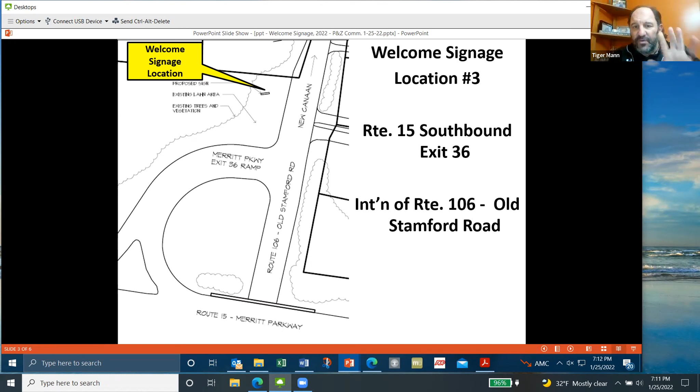This is a view of the intersection itself, and where you see that white sign with the yellow border at the top, right here, this is where we're planning on installing it. So as you're coming into town, it should be right there and very prominent for you.

We did consider this location, but again, we were looking at the fact that we were going to get snow splatter from the plows, and the sign itself might get damaged over time.

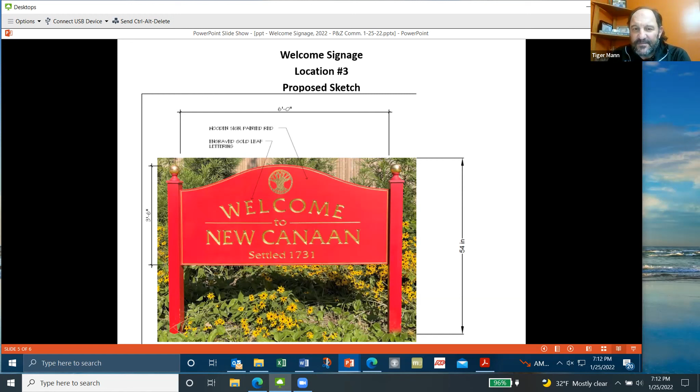Any questions for Mr. Mann? No, sounds like we're good. That was easy. Yeah, exactly.

Everyone see that? We can see it. Okay. So we were here a month or two ago for other locations in town. Now we're looking for a couple different locations and planning for the future. So I'll run you through the locations themselves. As you're aware, under 8-24 municipal improvements, no municipal agency shall locate, accept, abandon, widen, narrow, or extend any street, bridge, parkway, or other public way until the proposal to take such action has been referred to the commission for a report. So that's what we'd like to do.

Our first location is on Old Stamford Road, from Park Street to Bristow Park. I apologize, this is already under design - I didn't bring it forward when we brought the others. I actually thought I had when we brought Park Street to you, but when I looked at it, we had actually stopped at the intersection. This is about a 500-foot section, and we plan to have it on the north side of the road from Park Street right to the entrance to Bristow Park.

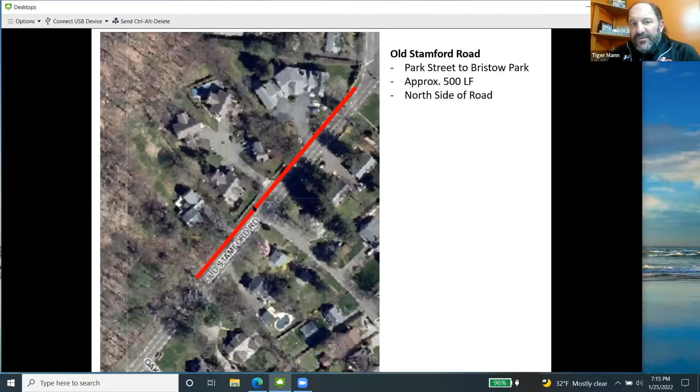The next section is actually an extension of that sidewalk. This just got recently approved with ARPA funds through the Board of Selectmen, the Board of Finance, and Town Council.

This would extend from Bristow Park down Old Stamford Road to Gower Road. It's about 1,900 feet long. At present, we're looking at the north and west side of the road, but we might be asked by the DOT or some residents to look at the south and east sides as well. So when this goes under design, we've asked the engineer to give us an alignment on both sides of the street. It comes under DOT purview, so we've got to satisfy their requirements, and one of those might be that it be on the inside of the curve instead of the outside.

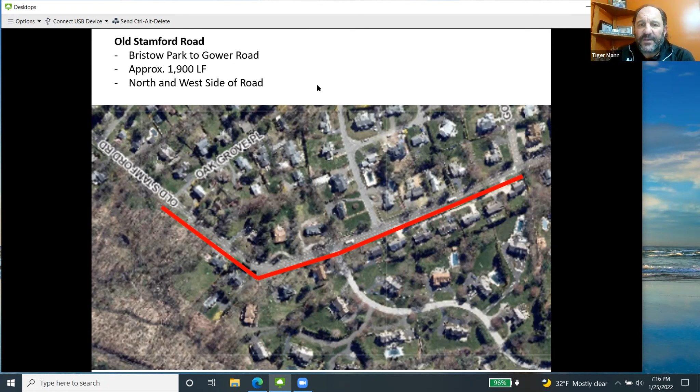The next section is on Lakeview Avenue, from Main Street to Millport Avenue. It's actually a connection. We have sidewalk on Millport Avenue leading to Lakeview, from Millport to Route 123, and then to the school on Littlebrook. This is one stretch that we don't have. We have a stretch on Millport Avenue as well, down through Mill Pond and then all the way across Millport to Main Street. This is the one stretch we do not have in town.

It's about 1,100 feet long. At present, we're looking at the north or south side of the road to see the alignment. Our preferred side is the north side. We'll take a look and see exactly what we can come forward with, but we seem to have much more right of way and some additional pavement on the north-hand side, and it seems like it would be an easier fit. The Millport apartments are here, and there's another set of condos here. It seems to fit nicely on the north side of the road.

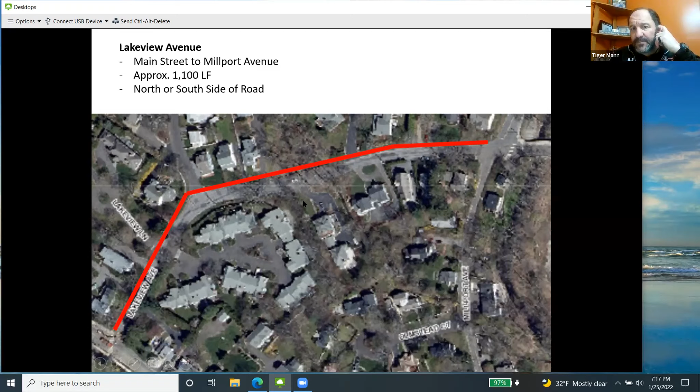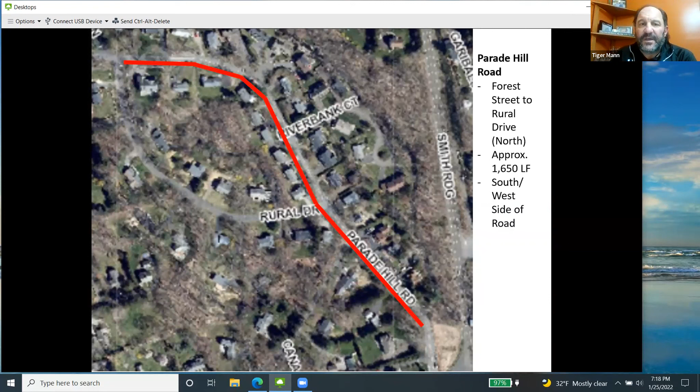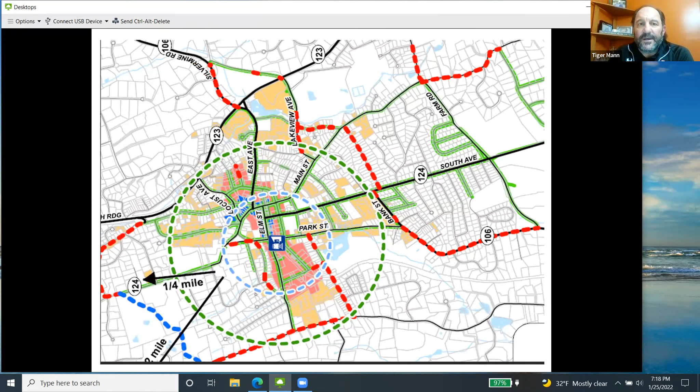If we take a look at the POCD in 2014, this is the pedestrian map in the Plan of Conservation and Development, and the section states to expand the sidewalk network in and near downtown. Looking at the four sections we were asking for, this is Park Street, this is the intersection with 106. The first section was here to Bristow Park, the second was down to Gower Road, and then we'll look later at this possibility. We'd like to see how much use we get through this section before deciding to extend it for that last piece.

The next section we looked at, or requested, is Lakeview Avenue from Millport to Main Street. It's detailed in this red dashed line, meaning that was a proposed sidewalk extension from the POCD. And then the last is Parade Hill Road, up to Rural Drive. This last extension is much more difficult to construct, and we'll look at that at a future date to see if we're getting use out of the sidewalk.

To give you an idea of where we stand overall, you can see those segments. This segment is complete. We're looking at redoing the intersection at Park Street. We have a grant to complete this, that should be done. Richmond Hill, we have a grant to do this piece. This segment's been completed at Richmond and Grove. Park and Richmond Hill has been completed, and there was a section at Mead and Park that's been completed.

This section on Millport will be reconstructed this year as part of paving. This section of Old Norwalk Road has been completed, and we'll look at this section of White Oak Shade at a future date. This section at Park Street is under a grant. This section of Seminary has been completed, and we're looking at these last two pieces here. As for the stretch between Richmond Hill and Elm Street, we'll look at that later, but the stretch from Elm Street to Irwin Park has been completed.

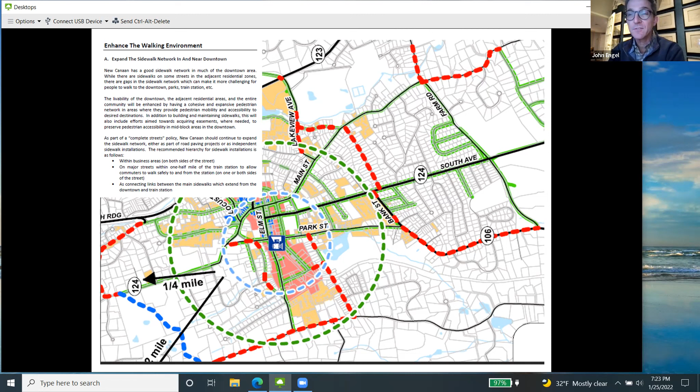And so anybody with our approval starts that process. Yes. This is a necessary step.

This is John Chris. What construction materials do you plan to use for these sidewalks? We'll be looking for each one of these to be concrete. And then depending upon the alignment, if it's alongside the edge of the road, our standard is to armor plate it with granite curb. And if there's a grass shelf, we'll use a bituminous curb as the curbing.

Thank you. You're welcome. Anybody else? Since he mentioned materials, has there been any feedback, negative or otherwise, on the very sharp granite curbing that you've been putting out for the last couple of years? Very, very minimal, to be honest. After one season, our plows seem to take off the edge, and then the comments go away. It's usually in the parking areas, say downtown, where we get the most complaints. On Main Street, where we had granite running up and down the length of the street, we didn't get any complaints there. It's usually in the downtown area when we install granite that we get complaints, from a parallel parking standpoint.

Tiger, it looks really good. Question for you on a couple of big trees in the way. Have you thought about working around the trees and things like that, where you can put some gravel down and bridge that kind of tree apron?

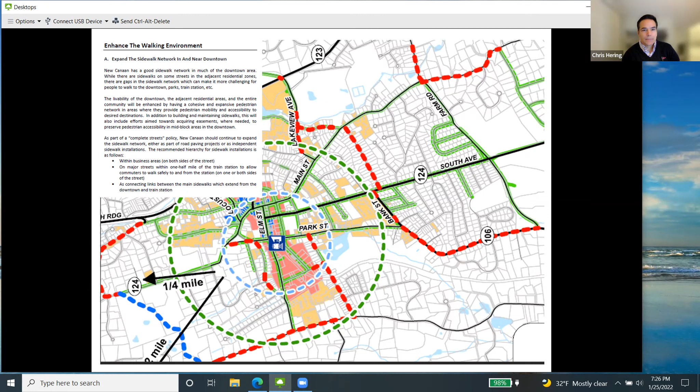Got it, thank you. You're welcome. Anybody else? Okay, I think we're good.

Commissioners, as you know, the motion we need is whether this project is consistent or not consistent with the Plan of Conservation and Development. Do I have a motion? I'll be glad, this is Commissioner Cassavant, to move that the report is consistent with the POCD. Thank you, Mr. Cassavant. Do I have a second?

Second, John. Okay, Mr. Chris. One thing I'll note is it's amazing when you put in sidewalks how it brings out people. I look at Elm Street to Irwin, and it's amazing how it revitalizes things. So I think it's a great expenditure of our taxpayer dollars.

Any other comments, or I'll call the question? Okay, I'll call the question. I vote yes. John Chris, yes. Krista Nielsen, yes. Dan Radman, yes. Claire Tiscornia, yes. Kent Turner, yes. John Engel, yes. Arthur Cassavant, yes. James Bash, yes. Great, passes.

Thank you, Tiger. Thank you very much. Okay, so as I noted, 255 South Avenue is withdrawn, and 190 Brushy Ridge Road we expect to be open at the February meeting. Therefore, there are no votes for item number 5.

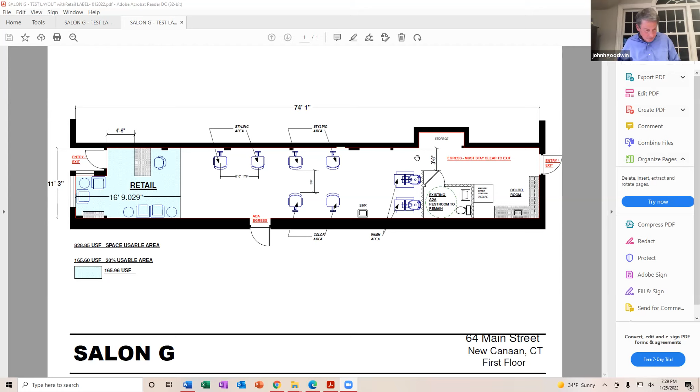Okay, do I have questions for the applicant? Everybody good? It's Kent Turner, I have a quick question on the accessible bathrooms. I don't see in the plan any grab bars, and I believe that's an existing condition. Could you let us know if in fact they do conform to ADA and the grab bars exist? Currently they are in there, yes. Okay, great, thank you. Anybody else? Okay, everybody good? Okay, super, okay, this is closed.

Do I have a motion for approval or denial? John Chris, I move we approve. Mr. Chris, reasons for approval, please? I'm pleased to have a fully ADA bathroom. In my view, it conforms with our zoning code. It seems to be an important amenity for our town, helps promote traffic in our business area. I'd see that as a plus, supporting our downtown merchants.

Okay, thank you, Mr. Turner. I think I saw a second from you, is that correct? Second from Mr. Turner. Any further discussion of the motion? Okay, I call the question.

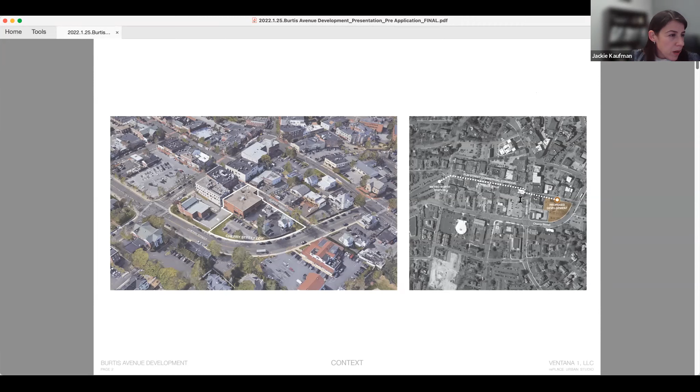The properties here, we have 4. Maybe we advance to our next slide too, we can see we have 4 here. Jennifer, you can highlight the 4, because the first one is sometimes a little confusing. This is 21 to 25 Burtis, 11 Burtis - that's 11 where she is now, and 21 to 25 before, and then the Cherry Street lot to the south.

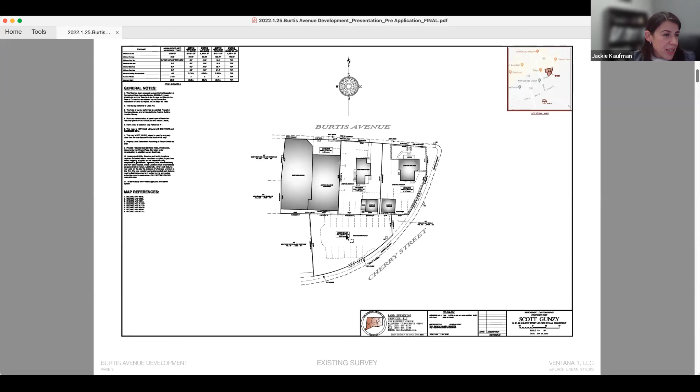And then we can advance to our next slide and see our downtown and the zoning map. The subject parcels are outlined in red on the right-hand side, and you can see the Business A zone identified there by the yellow color. This property has Business A zone on all 4 sides of it, and then also to the west it abuts the retail A zone.

The proposal is to merge all 4 of these properties and develop them with a residential development. There will be a live-work component, which we'll talk more about in a moment, along with amenity spaces for residents, concealed parking, and a mix of different multifamily uses, with the massing broken up into several buildings.

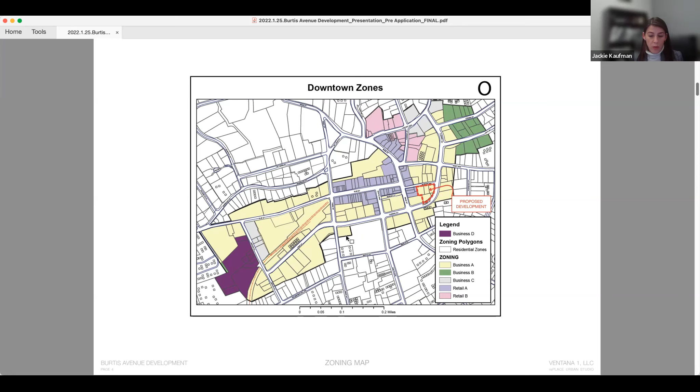So the proposal includes 7 buildings over these 4 lots, and a total of 26 residential units. Those will be inclusive of both flats and townhomes, with a mix of 1, 2, and 3 bedroom units, and 8 ground floor live-work offices.

The idea here is to invigorate the ground floor of Burtis. Jennifer, if you don't mind showing us with your arrow where the live-work is on the ground floor. Typically in these mixed-use retail and business zones there's a requirement, or I shouldn't say requirement but an expectation, for retail or other activated commercial uses on the ground level. Burtis has not been a very active retail street.

Given what we've seen downtown, and to not deplete from what is already a very robust market, an alternative is proposed here, what we call a live-work unit. I'll allow Philip and Jennifer to tell you more about this, because they're very well educated and have implemented this in other communities, but they're also experts on the subject, having been commissioned to write several industry articles on this concept.

This concept connects a small office that really serves as the office for an individual who would live above it. They're not connected through stairs — one would have to leave their apartment or condo and then enter in the front. But it provides that same goal of activating a street front.

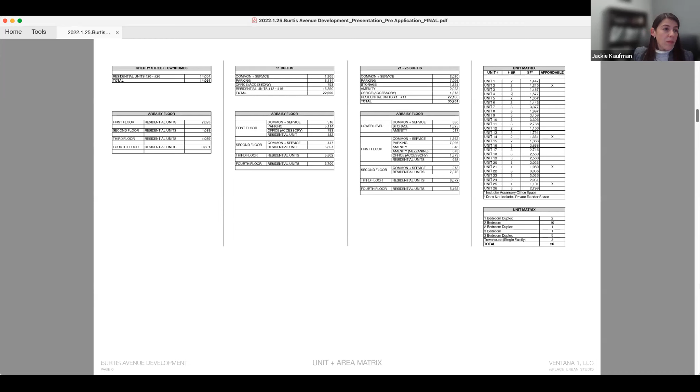So let's continue — let me see where we are in our next slide. Can we continue to our next slide, Jennifer? Oh, let's go back. This is not fun to look at, but I'll summarize this for you.

I've provided written summaries of my comments tonight so you have an opportunity to reference them going forward. As I mentioned, there are 26 total units. The sizes of the units range from 1,000 to about 3,400 square feet. There will be 4 affordable units provided on site, mixed throughout the buildings.

There's a total of 8 live-work units. Those units are roughly 200 to 300 square feet, and the parking total is 51. So each of the buildings you see, if you hover over, you can see where 11 Burtis is — that will include 8 units over 2 floors, plus the 3 live-work units at the ground level.

11 Burtis is roughly about 23,000 square feet. The next building at 21 to 25 Burtis is approximately 36,000 square feet, and includes 11 units, with a mix of 2 bedroom and 3 bedroom units. Then the tenant amenity space, which I mentioned, is located in this spot.

The Cherry Street lot includes 5 townhomes, 2 of which are connected, consisting of roughly 14,000 square feet total — 3 single family units and 2 duplexes. These include a range of 1, 2, and 3 bedroom units.

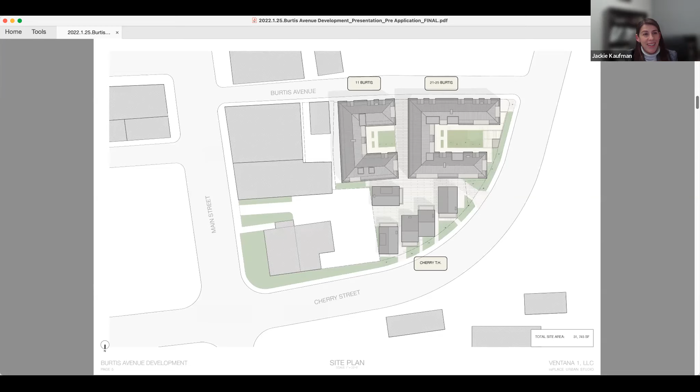We've of course gone through the town plan of conservation and development and the senior housing needs regulation with a fine-tooth comb, and have found many places where this type of development would meet several of the goals in both of those documents. But I'd like to allow Jennifer and Philip to share with you a little bit more about the design and some of the massing they've proposed.

Hi everyone, can you hear me? Great, I know we've been in and out, the muting and unmuting is a little rough. So maybe just to introduce ourselves a little bit to you.

I'm Philip, this is Jennifer. One of the interesting things about this site for me is that I've practiced architecture now for the better part of about 30 years. I was basically educated at Columbia University, live in Brooklyn right now with my wife and two kids. I grew up in Fairfield, basically four exits down the Merritt Parkway, so I know New Canaan pretty well.

My partner Bill, the reason we came to this parcel was that his dad is actually a local attorney in Fairfield. We went to high school together, and it's sort of a dream of ours to develop something in the Fairfield County area. So this opportunity came in front of us, and one of the interesting things for us is that we looked at your town and realized what a wonderful town it is. We spent a little time walking around, understanding it, and we think there's something we can offer in terms of our talents with regards to not only development, but also qualitative design.

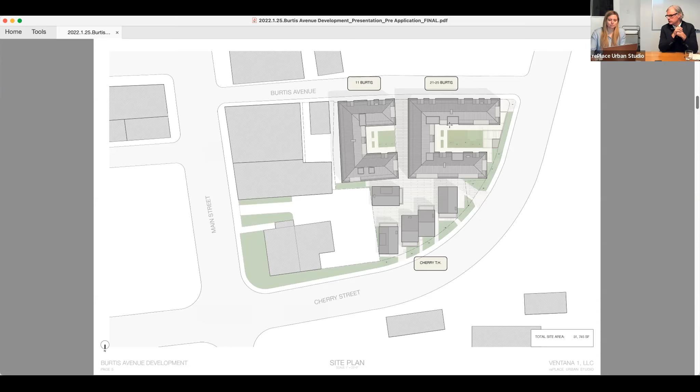I'll take you through the best way to present this to you guys, through the concepts that we generate the design based upon. This notion of live-work and sort of the ideas around live-work. It's a 6-minute walk from our site to the Metro North train station.

We all know, as we're sitting here Zooming together, that the world has changed somewhat, and how many people are getting on that train and going into New York City has obviously changed over the last 2 years. There's a lot of flexibility in work models, a lot of changes in work models. It's not to say offices won't be needed in the future, but the way people are seeing work now is perhaps: go to the office 3 days, stay home 2 days. And as we all know, I have small children.

Having an opportunity to be home but be at work at the same time is a really great amenity, and I think it's a great amenity for your town.

One of the amazing things is that we can offer, particularly on a street like Burtis, where it isn't in the heart of downtown but sort of off the beaten path—we're not on Main Street, we're not on Elm Street—an opportunity in what most people would feel is a very marginal retail zone to actually offer office at grade, as opposed to trying to put retail at grade, where along Main Street we walk down and there are a lot of retail storefronts sitting empty. This is a way to bring some life down to the street.

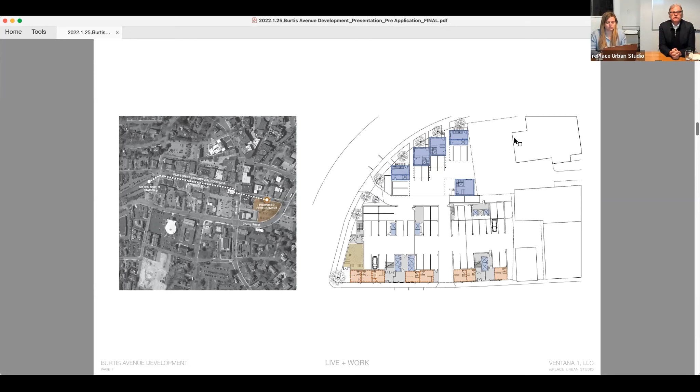One of the things on the ground floor—we're talking about actually reducing the number of curb cuts along Burtis Street. If you've ever been along Burtis Street, it's a pretty tough environment: on one side parking, strip mall, egress from the Chase Bank, and on our side there's 11 Burtis, a 1976-built office space, underparked even though we recently bought it, and a bunch of parking with 2 older homes at 21-25.

So how this street begins to become part of the everyday life of folks who could live in New Canaan—one thing we understand is that managed parking is a super important piece of the puzzle. So we're going to be reducing our curb cuts; there are currently 3, actually 4, curb cuts along the parcels.

We reduce that by 2. The idea is that Burtis would be one way into the parking, and obviously one way out to Cherry Street. We're working with civil engineers and traffic engineers to figure out the mechanics of this, but I think this is the sort of concept at this stage.

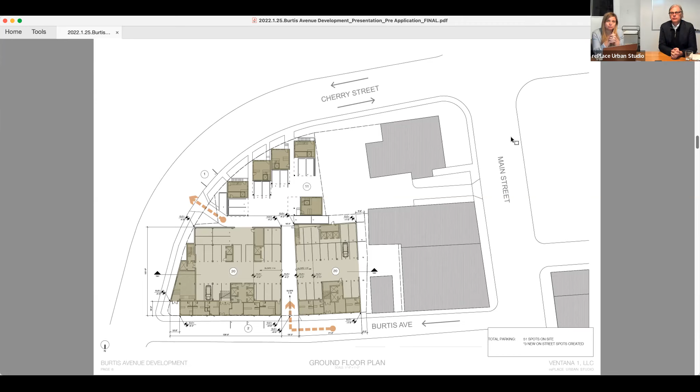Again, Jackie brought it up earlier. There are 51 parking spaces we'd be putting on site, which would meet the code requirement with regards to unit counts. We understand it's very preliminary and we're in preliminary design phases on this too, but this is our intent.

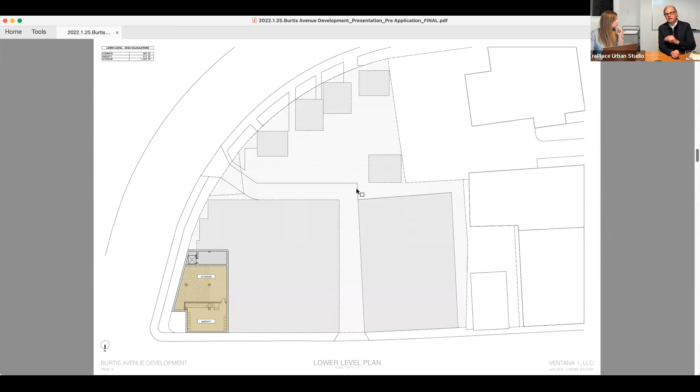I'll quickly take you through this. One of the ideas, much like we were talking about with live-work, one of the other important points that Jackie introduced earlier is this idea that each of the multifamily buildings are actually centered around a central courtyard. So in the middle of the development, these central courtyards begin to organize the units around them.

At grade, if you're coming down Burtis Street, you'd walk down Burtis, come into the lobby, and then walk up into a centralized courtyard. We all know, again with COVID, this notion that outside has a safety associated with it. I think this is very much a Parisian model in its construct.

The idea is that you'd have garden level, plaza level apartments that are above the raised parking. So you'd have offices along the street that shield the street from the parking behind it. You'd come into the lobby, move up through the lobby to a plaza, and then enter not only a plaza, but the place that you would enter your unit into.

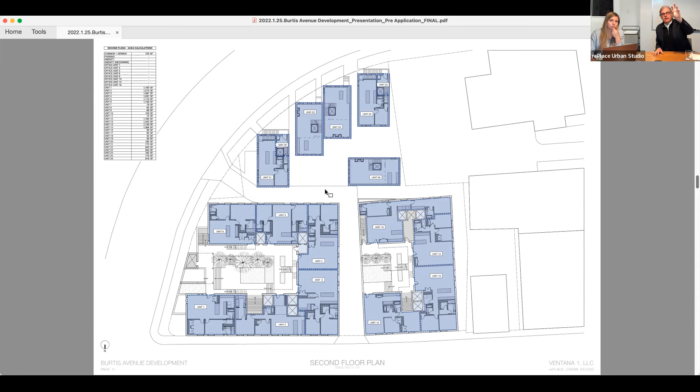Down in the townhomes, it's a similar idea. You have the two plaza spaces, and down at grade in the plaza area, it's a little akin to the idea of suburban driveways, but essentially people could park below their townhouses, and that area would be landscaped in a way that allows children to play in a larger courtyard.

Perhaps there's exchange of neighbors there too. Our goal is to build a model where the open spaces arrange how you move through the space, but also how you move up into your own unit.

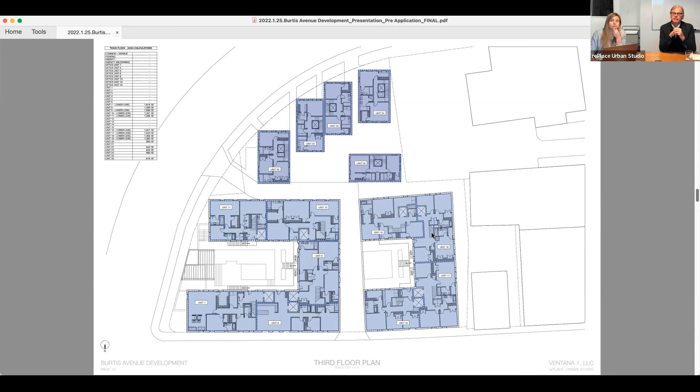Not only do you have the plaza units, but then up above you'd have duplex units, all accessed from a private elevating system, again thinking about COVID and shared interior spaces. The idea is that these units would be up in the sky, with a more gracious view out, but again it's about how people move through the space based on the open space.

Another point is the upper floor, which would exist in the roof structure of the building. You'd have 4 duplex units in building 11, 4 duplex units in building 21-25, and then the townhomes along Cherry Street.

The other thing relates to affordable housing, and we're very mindful of it, trying to meet the requirements of the new affordable housing regulations. In each of the multifamily buildings there'd be an affordable housing unit, and then in 2 of the townhomes - there are 3 single family townhomes and 2 duplex townhomes - the duplexes would have 2 affordable housing units.

From our work in terms of multi-generational, mixed income housing, it's something we believe in as a design company, and so for us, we want to meet this requirement.

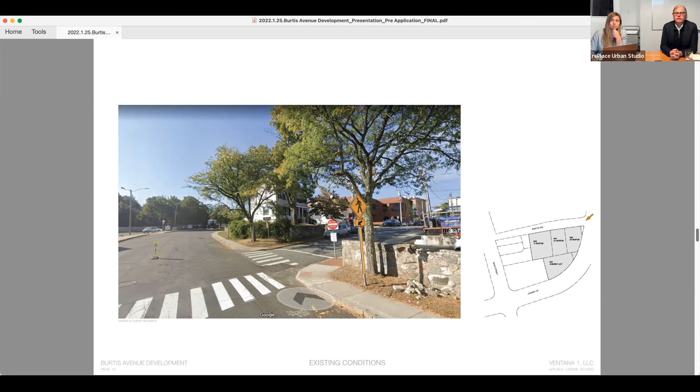We understand the other side of the street is a bit different—the buildings there have some discontinuity to them. Our hope is that by holding that facade along the street wall, we can bring some order to the area.

Another concept I'll talk about is this notion of materiality. Our practice is built on a design aesthetic of simplicity, so we always say you need to earn the ability to get to four materials—for us, it's about finding three materials to work on a facade. What we're proposing could be really beautiful in a simplistic, contextual, iconic way. The primary facade material would be limestone, which is a very warm stone—I don't know if you've seen it.

It has a sort of veining in it that's really beautiful. The windows and doors along this facade could be low iron glass with steel frame windows and doors. One idea is that perhaps the folks across the street at New Canaan Forge could make a filigree dark metal detailing, which would essentially be the transoms of the windows and the railings along these larger door and window openings. The roof would be a standing seam metal roof.

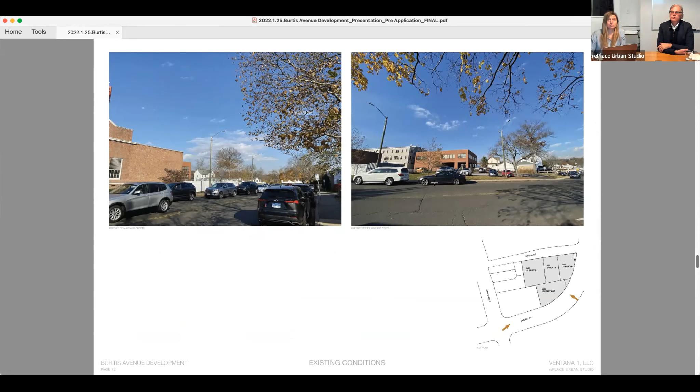Again, trying to keep to that idea of three materials—this primary facade would be a low iron Roman brick, 20.5 inches long, 1.5 inches in width, with natural wood and glass, the detailed dark metal, and roofs with standing seams. Similar materials rhyming in—being from Connecticut, I always love the Mark Twain line that history doesn't often repeat, but it often rhymes. So these facades rhyme with that Mark Twainian Connecticut side of things.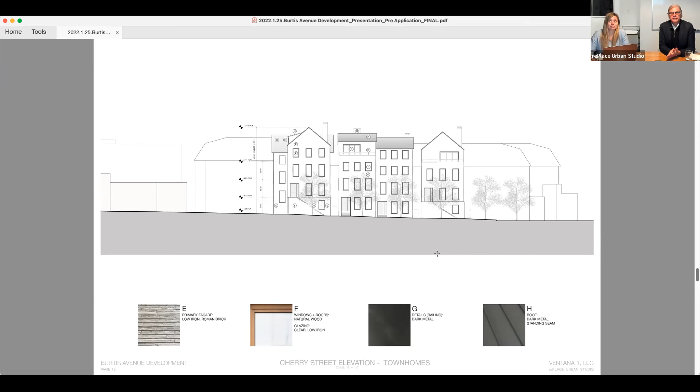Now looking from the base of Cherry, looking up towards Main Street. You're beginning to see the multifamily on the left, the townhomes on the right—or if I have my mirroring correct, the multifamily on the right and the townhomes on the left. On this facade, you begin to see some of the natural wood paneling, which will screen the parking below the townhomes, and then begin to form that mass which captures the amenity space, and beyond it is the plaza for the interior of the multifamily.

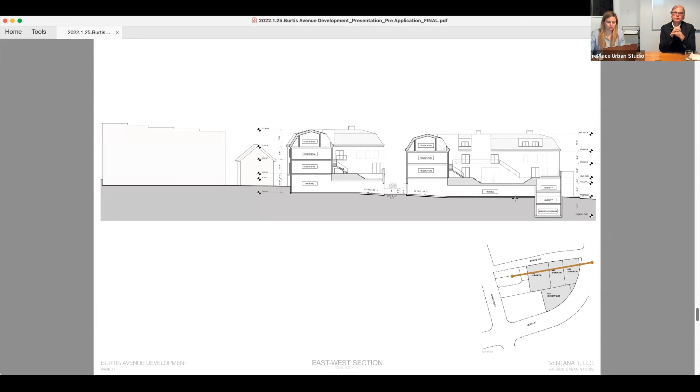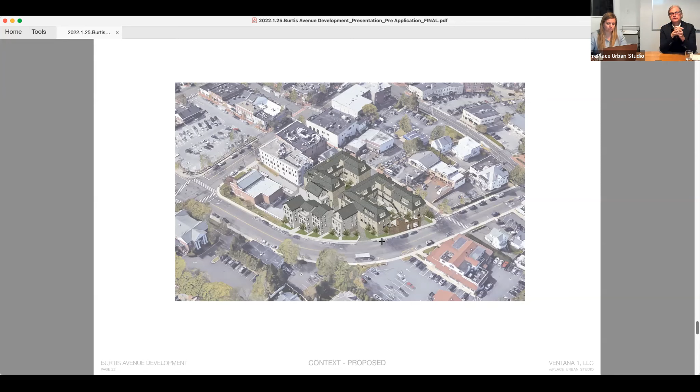One of the things about our practice that always works through any of the work we do is that we're super environmentally sustainable. We really believe in wellness in building practices. And I think one of the things is to not put upon your neighbor what you could do on your own site. So we're talking about rainwater and gray water reuse on the site, so we're not dumping our waste into the local sewer system, geothermal wells, and solar panels. We're hoping we can reach a place where we're not drawing off the grid for any of the cooling or heating requirements of the structures on the site.

That's it, that's it. That's where we are. Thank you, Philip. All right, I know it's long-winded, I apologize. We're really excited.

Can I say one thing, Jackie? We're super excited. I thought it was great. No, I thought that was great, and I hope the commission has questions for us, so we'll defer back to them now.

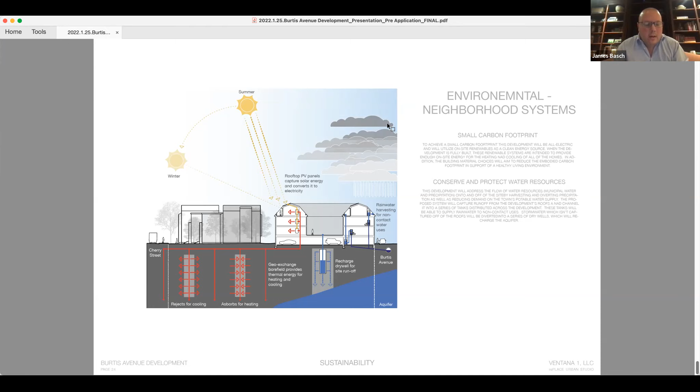Commissioners, questions for the team? Mr. Chairman, on Chris, question. It's a really interesting concept, and thank you for the presentation.

Just looking through some of our regulations that relate to this project, I think what stands out to me, and I recognize, Mrs. Kaufman, that you mentioned there could be an adjustment to the overall height. But to make all aware, we have a maximum building height requirement of 30 feet or 2.5 stories, whichever is less. That changes, by special permit in a retail B zone, the maximum building height may be increased above 30 feet and up to 3 stories, provided the commission makes a number of findings. So thinking about this within the context of the quaint New England downtown we have, I think that would be my principal concern, the height within that context.

Thank you. The height that has been proposed has been motivated by the height adjustments permitted by special permit under the new affordability standard, which allows up to 50 feet if affordable units are provided on site. Certainly that's a site-by-site basis as part of your special permit review. So we'll take that into consideration as we refine the plans.

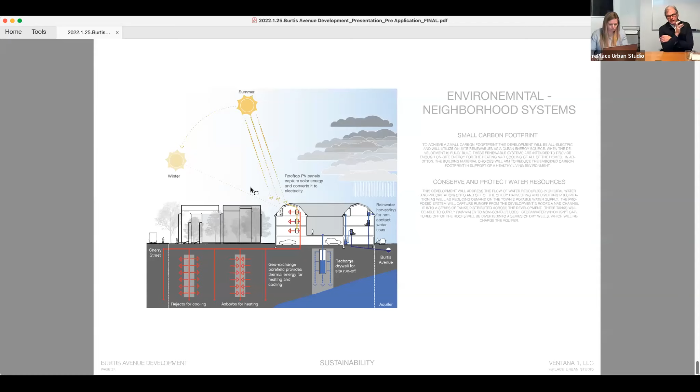Sure, go ahead. Can you go back to the elevation? I don't think we would propose something of this height in another situation or with different topography. You can see the line, Jen, can you go over there? The height of the buildings on Main Street are actually that height over where you see her line. So we're actually below that, because the topography of the site is falling off. Even though our graphics are somewhat exaggerated because we're trying to describe the project to you, from Main Street it actually is less intrusive. I just wanted to point that out.

We understand the question of height and bulk here. We do believe in the affordable housing that you guys approved in terms of height, but we're trying to be as understanding of that as possible. Understanding your downtown height and where you guys are along Main, we're trying to respect that and be a bit below it, if that's okay. But we understand it for sure.

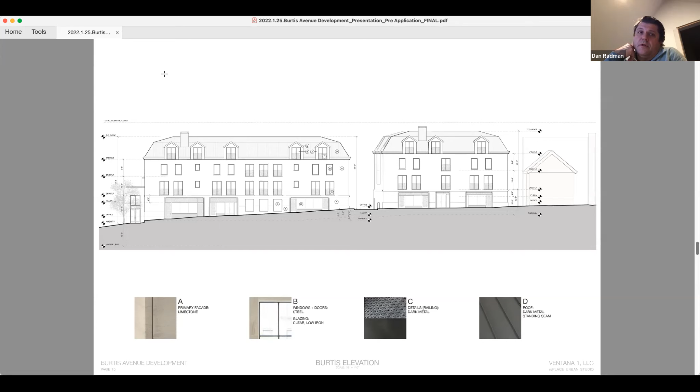How does the tallest building on Main Street, or Elm Street, sorry - this is Dan Radman, by the way. The tallest building is at the corner of Main and Burtis, the brick building, the one to the right there. That's purely a byproduct of the fact that it's a 3-story building with a really tall parapet height above the 3rd story and tall ceilings on the 3rd story.

How tall is that building, and then how tall, regardless of the slope? I know you're trying to compare sight lines, but I really don't care how tall a building is that's a block or two away. How tall is that building at its maximum height, and how does that compare to the height of your building?

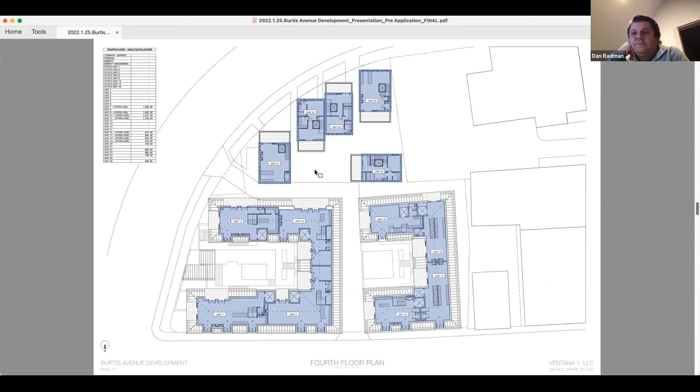I don't know off the top of my head. It's probably 40 - I was gonna say 38, 40. We don't have it off the top of our heads, what the height of that building is. We always talk in relativity in terms of height, and because the ground plane slopes, where relative height happens we could get back to you on. In our next submission, we'll definitely mark what that height is.

In your zoning code, average height is based on the 4 corners of the building. Understanding from those 4 corners - I think we haven't done the analysis of that building per se, but on our building proposed, we're below the allowable for the 4 corners against the inclusionary housing or the Affordable Housing Act. I think 11 Burtis is at 45 feet if you measure the 4 corners, but we can get back to you on that. I don't know the answer, sorry.

One more question - you mentioned visiting and analyzing the context and fabric of the downtown New Canaan area, the majority of which are 2-story buildings in the business district. There's only a rare building that's a 3. Do you think this development is sympathetic to the rest of the context of the town, given the scale and the design?

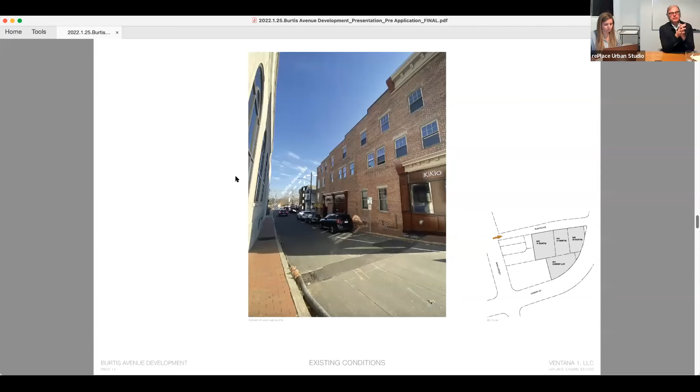For sure, and I apologize, it was the last elevation, we're obviously working through this and we're preliminary at this moment. We feel like, and I agree with you, activity along that facade is super important. So what we're putting there, Jen, if you can pull up the elevation. I apologize, it wasn't in the posting.

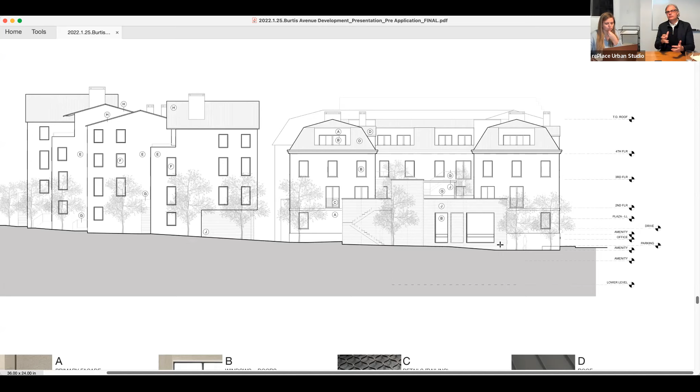The hope with the amenities is that you go outside and actually walk along Cherry Street, because there isn't a lot of pedestrian traffic down there right now since there's a giant stone wall that exists there. The idea is to begin to bring some life through these windows and piercings on that facade, which would be more wood instead of stone, a little softer, a lot of glass, and hopefully bringing a lot of activity that isn't there now. So that's what we're trying to achieve.

And obviously the plaza above, hopefully by being two floors up from across the Compass real estate across the way, and the pub on the other side, we're trying to bring people down to that area. That's our hope. We feel like even though it is sort of a building amenity, it is the retail building amenity component of the site. So that's kind of what you're looking at here.

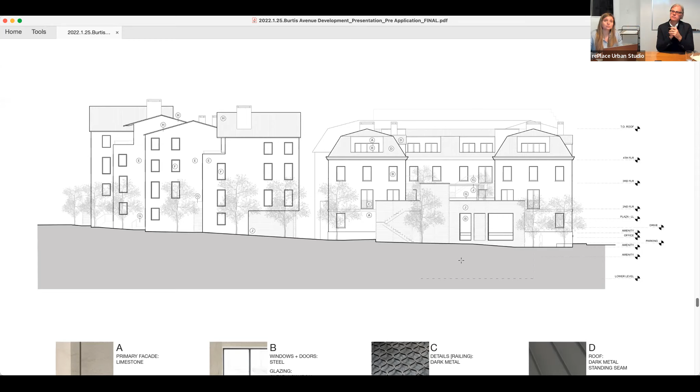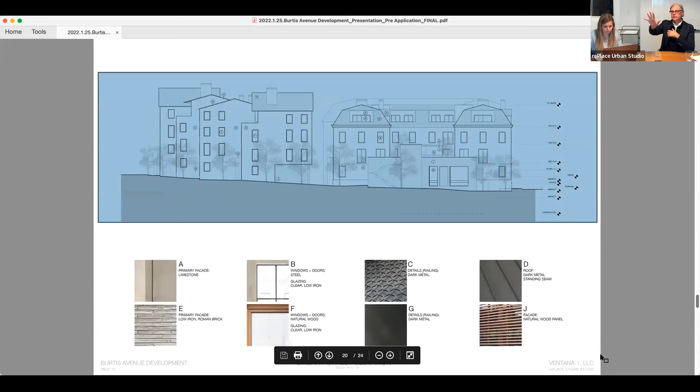Jen, can you go over and show — I don't know if you can, right. So the idea is sort of a screened wood, a softer feel along that facade. And then obviously there are penetrations, but also windows behind it in a sort of screened, interesting wood manner. That's sort of what we're looking at there.

Is it fair to say that this is a gym, not retail, and along Burtis Avenue these are live-work spaces, and that those decisions were dictated by parking — by deficiencies in parking — and that's why we have live-work spaces and a gym, because otherwise if they were legitimate retail mixed-use environment in the old sense, we would be underparked?

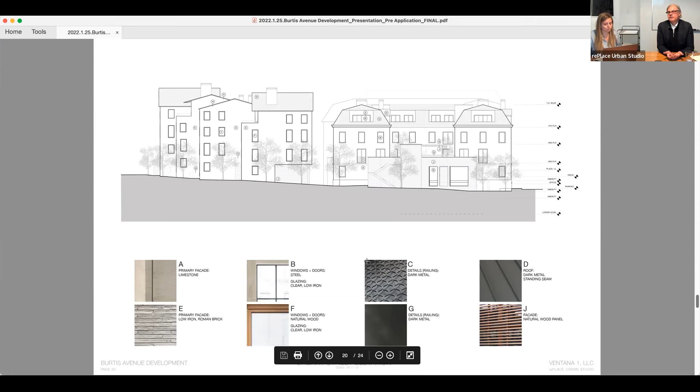That isn't how we arrived here. I don't want to belabor the point, but that's not how we arrived here. I think if you look at our experience, live-work in this construct could actually bring folks to the street down here. And in terms of amenity down there, if that spot were to become retail, I think we would figure a way to make that retail.

Again, we're proposing a design, we're not incrementalizing a design, and we're not trying to skirt the underlying regulations. We're actually trying to work within them and bring something that we think could be a really great addition to the pedestrian environment of downtown.

Currently there now is, as I said, a stone wall, another stone wall, four curb cuts, and probably 20 parking spaces at grade. So there's no retail there now. We're trying to bring something different, and we love the comments because we've racked our brains on this.

The offices came well before any of the parking, so I just want to say the idea isn't parking first and offices second — it's actually offices first. And if we didn't have enough parking, we would go somewhere else.

So in terms of how do we make this work — this is literally a design process, and what we're really trying to do here is bring something interesting and different. When we talk about Zoom rooms, I don't think it's Zoom rooms exactly — they'll have Zoom capacity there — but it's literally, if you took a home office that everyone's using right now and put it down on the street, that's really the idea.

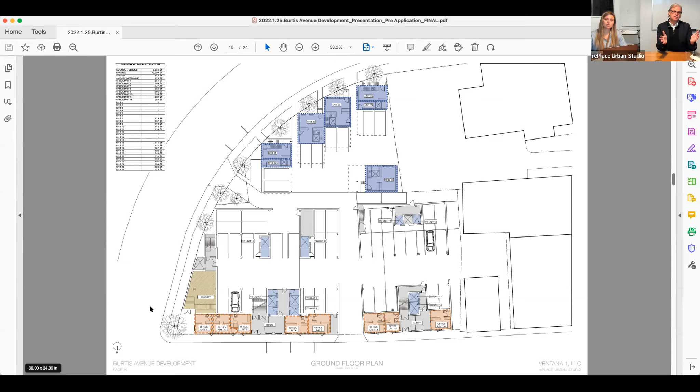That's really what this is about, trying to bring people to the street and making an effort to do that. If we said, okay, let's make some of it retail, we'll figure out a way to make it retail. From our understanding of the economics of downtown, there are great, amazing retail opportunities in downtown, and that's not to say every characteristic doesn't need to exist there. We just feel this could be a different kind of way of engaging Burtis, making it a place where you see people on the street, and the retailers across the street - hopefully coffee shops and beauty salons and all the things that come with people living downtown - benefit from that as well. If all the retail is in our development, none of these folks are going out to the retail in the neighborhood.

So again, we're very open to ideas and different ways of thinking. We've struggled with it, but I definitely don't want you to think we went parking first and figured out what fits after. That isn't the intent.

And the scale of the offices is actually very intentional, so they don't become a place where people are having 10-person meetings. The idea is that someone who lives here actually comes out of their house and works here, and if they need a larger meeting, they're walking up along Elm, getting on the Metro North, and going out to New York, or finding another shared conference room for that larger scale meeting. So we don't want it to be a place where everyone's coming for meetings.

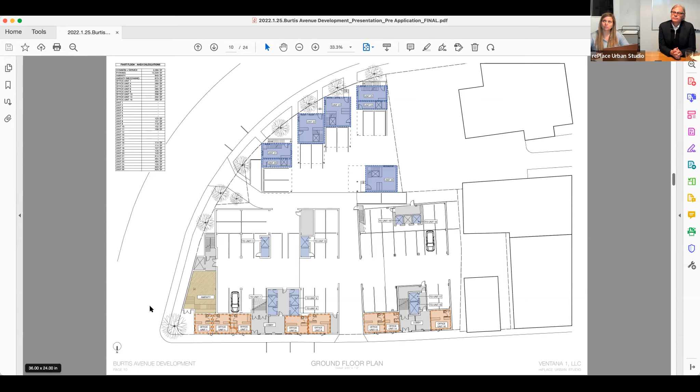Hey commissioners, may I add to that response too? Thank you, Philip, and thank you Mr. Engel for that question. When we talk about backing into things, I didn't discuss what an as-of-right business A zone application could look like. That actually calls for quite a bit of density, with 750 square foot max unit sizes. That's the goal under the as-of-right development schedule.

So we'll be looking for 1-bedroom units at 750 square feet, which could produce on this site, assuming it could be parked, around 50 up to 54 units. I don't know if that's necessarily the goal here, perhaps that regulation was designed to place units in smaller properties or smaller developments. Taking the approach using some of the special permit tools available, be it under the affordability component or the sister regulation of retail B, seems much more appropriate and in scale. Part of the approach the applicant took in designing this over the last several months, thinking through the concept plans, was trying to determine if the as-of-right development scheme was really appropriate, because that would produce a different type of density and proposal.